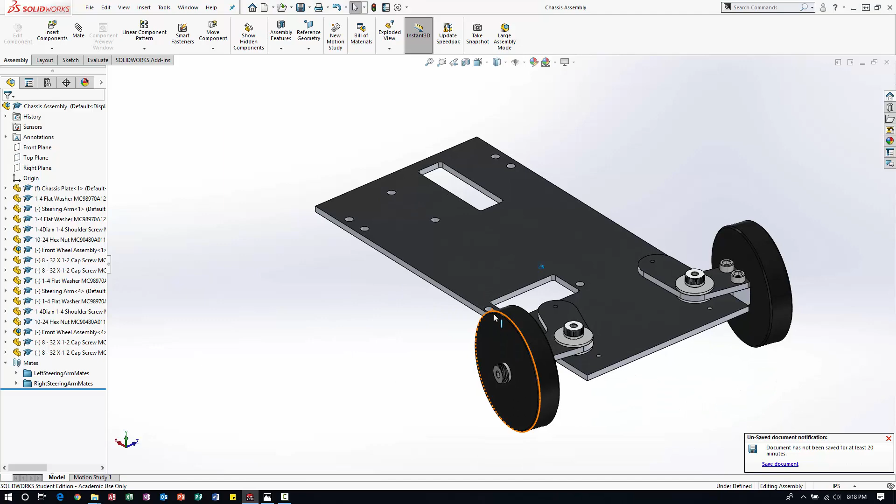This video should be much shorter than the last one. We basically built the foundation already. Save the document, make sure you always save. All right, we have two independent steering arms right here, and what we want to do is connect them. Let's jump right in, we're basically just finishing the front half. Now we'll add the steering rod, the servo, and connect everything up, so it shouldn't be too bad.

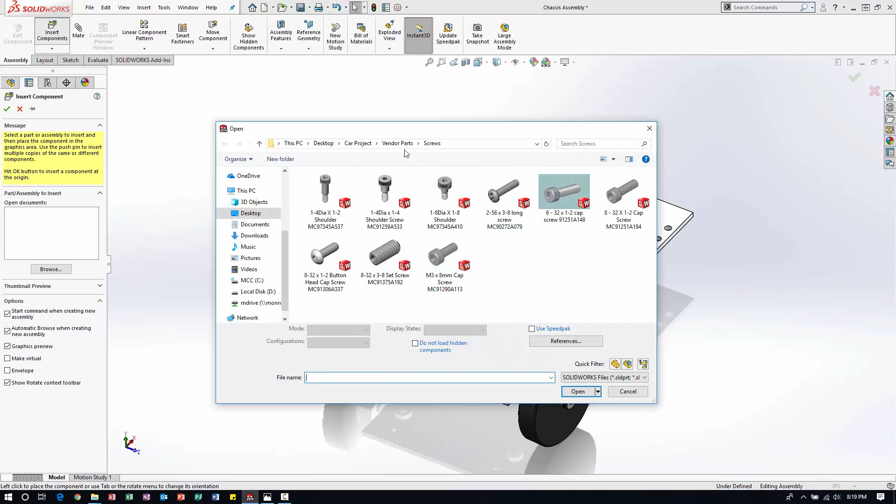Let's do that. I'm going to insert a component, it's going to be car parts 1, and I'm just going to insert the steering rod. Click open. So I have that inserted.

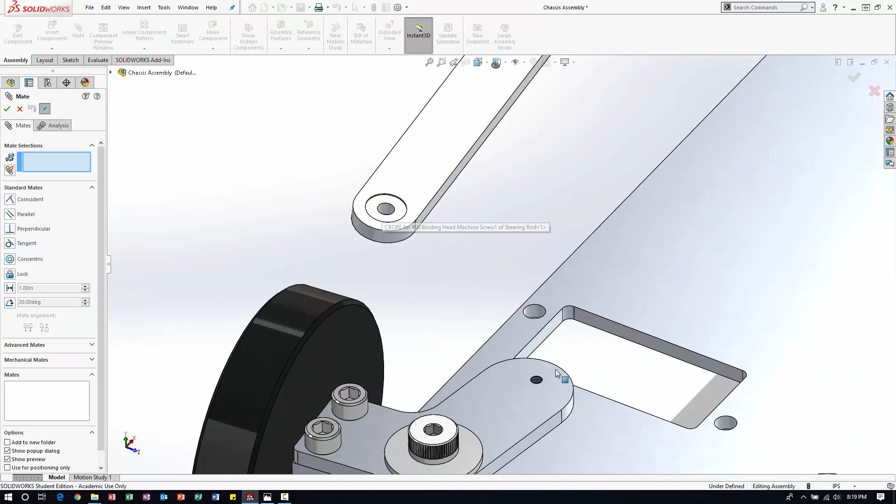Let's add some concentric mates between these two, to link the two steering arms together. I'm going to add a concentric mate here between that face and that face, between these two circular features. Another one here.

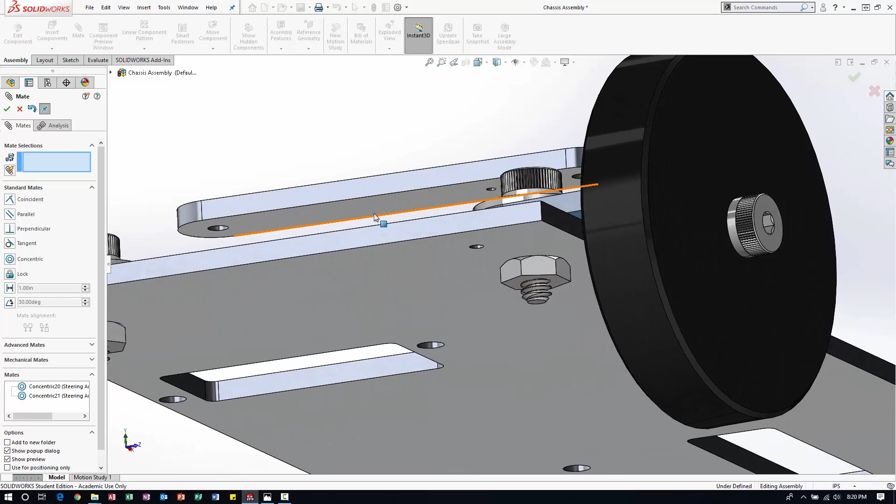Now I can move these up and down. So what I want to do next is add a face to face mate. Click OK. Let's look at it from top view. We're basically linking the two. Perfect.

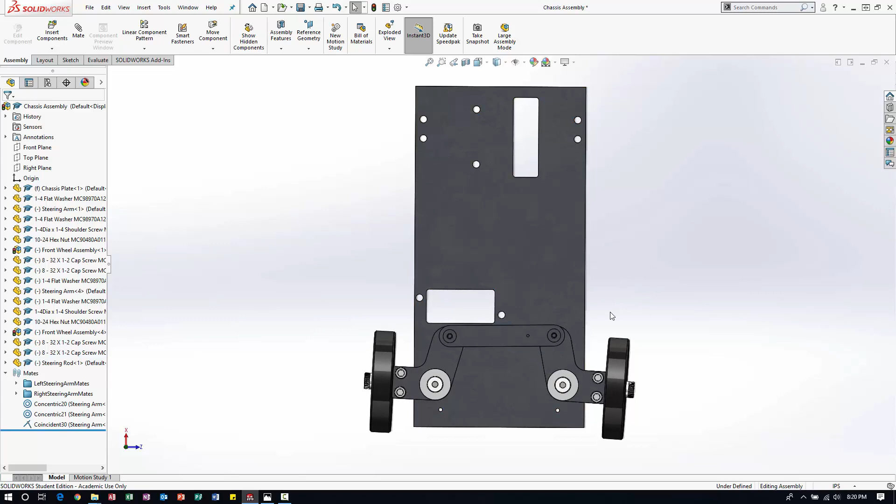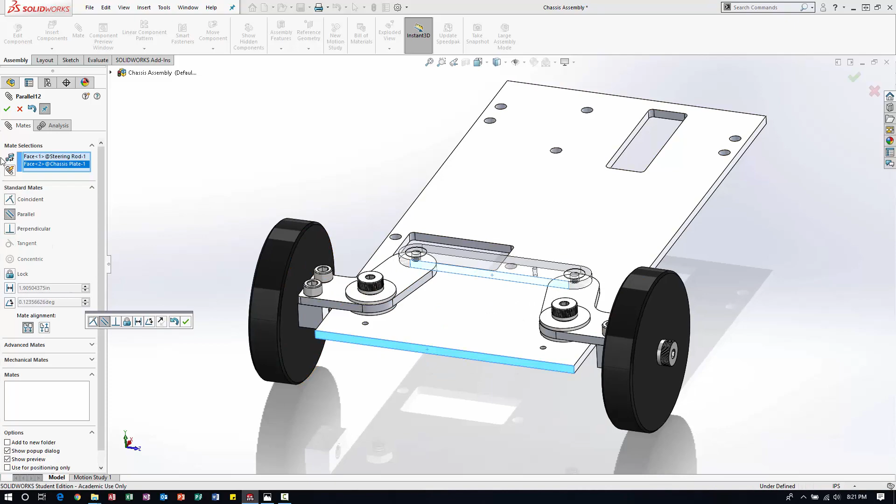For fully fixing that, for the purpose of if we want it to be straight, let's add another mate that we can suppress and unsuppress as we like. I'm going to add a parallel mate here, and what that tells me is that if that parallel mate is active, these are straight, I can't turn them, because of that parallel mate. So that makes sense. I'm going to suppress that, and if I suppress it, I can move this.

Speaking of that, let's add a new folder, again trying to keep everything neat. Let's call that Servo Mates. We're going to add the servo, and the whole thing is going to be driven by the servo, so we can just call the folder Servo Mates. I'm going to throw these in there. The reason why is this tells me that there is one that's suppressed or unsuppressed, so imagine having all these open and trying to find the right mate. So organize them in the folder, it makes it so much easier.

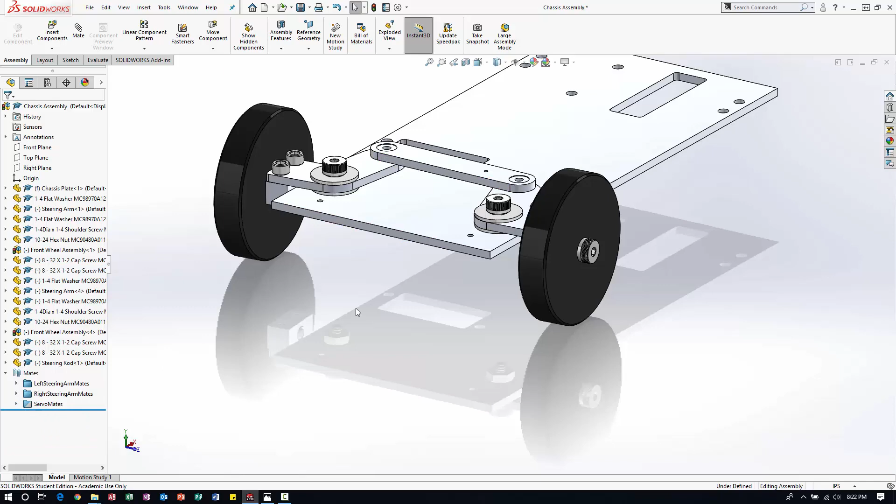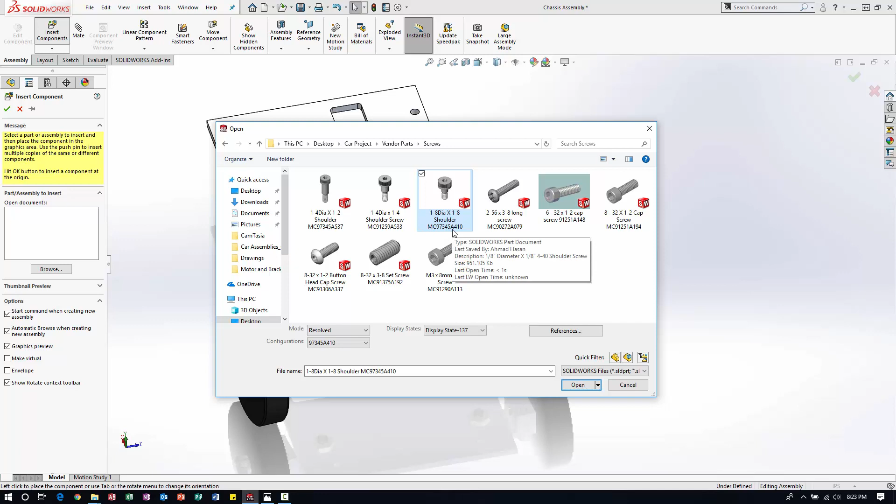So what I want to do next, let's throw in our two screws. It's a 4-40 shoulder screw for here and here. I'm going to insert a component, Car Project, vendor parts, screws, and this is going to be 1/8 diameter 4-40 shoulder screw, which is 97345A410. That's the part we're looking for.

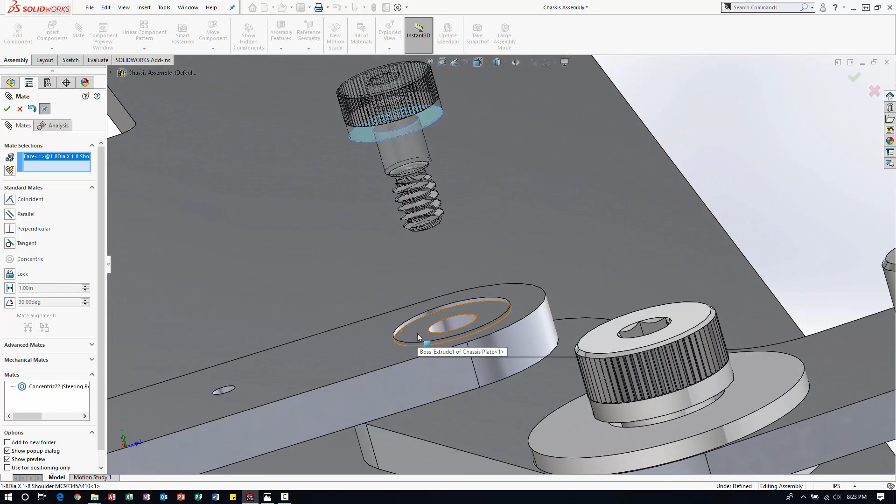I'm going to insert that here, and let's fully mate that. I can select any concentric circle to add a concentric mate, and it's going to be between these two faces. To fully constrain it, I'm just going to add a parallel relation between these two, so that it does not rotate. If I try to rotate it from here, the screw does not rotate, but the steering arm rotates.

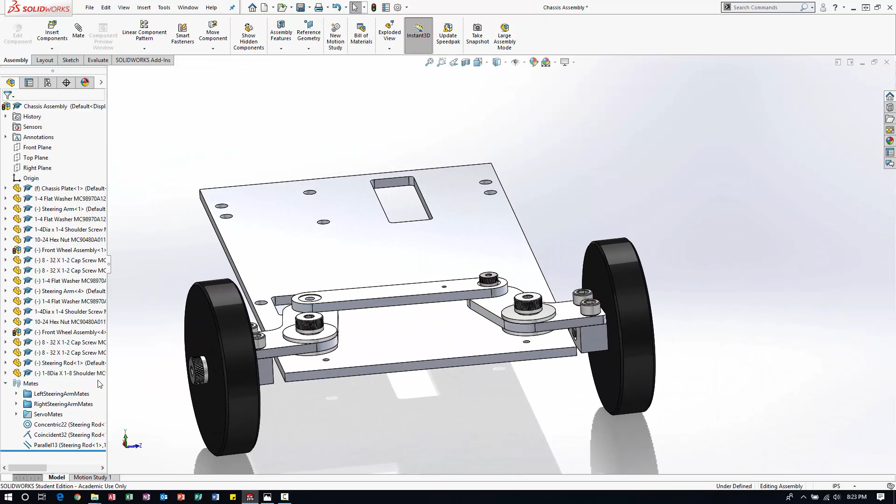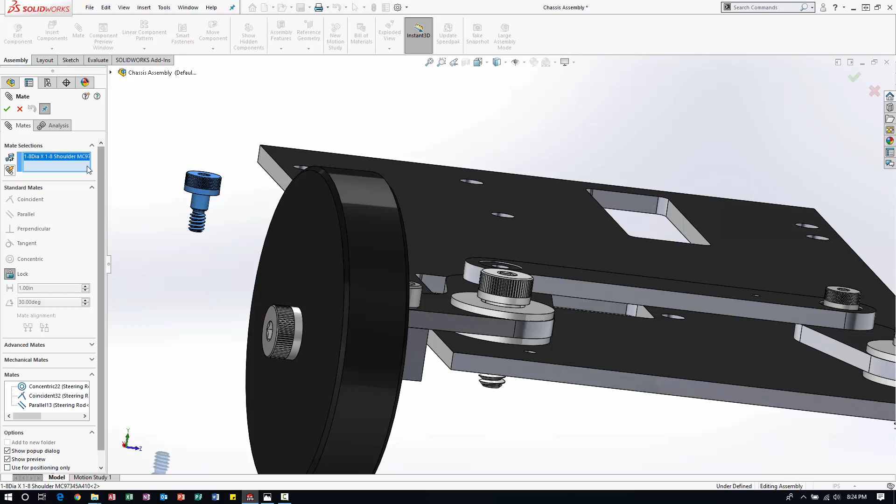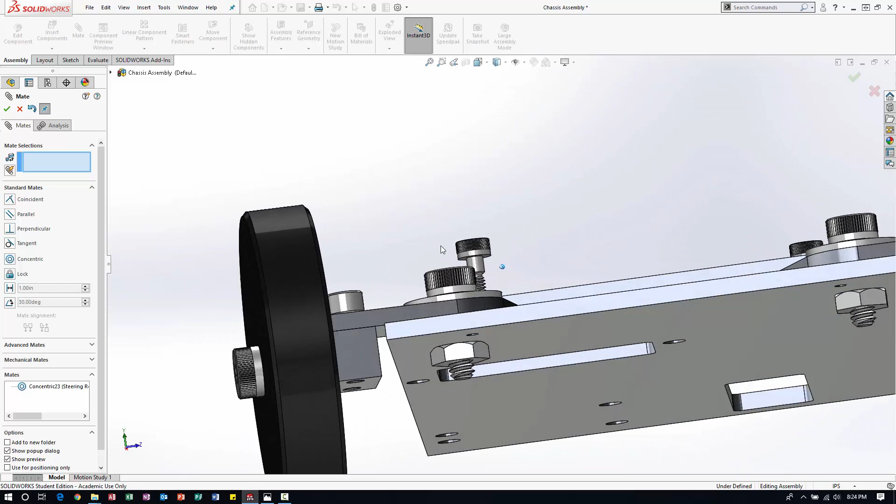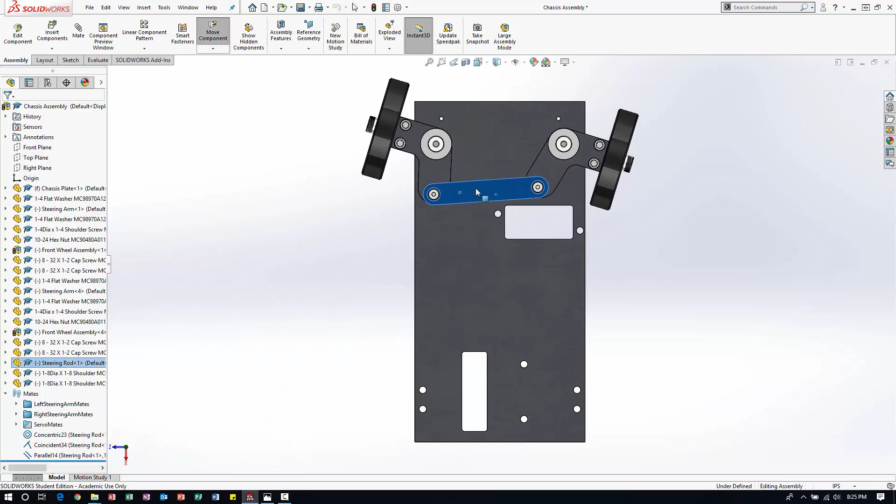We're just going to replicate the same thing here, so I'm going to throw these in here. I'm going to hold the control key and drag one out instead of going to insert components and grabbing that part back, I don't want to use that. Let's do, oops, I'm selecting the wrong one, keep selecting the wrong one. Oh, my lock is toggled on, sorry about that, it selects the whole part, keep doing that. Let's do that, it's going to mate the two faces. Also, I want to just add a parallel relation. Perfect, and if I go to my top view now, I have my two screws, and that's the motion that makes sense. Perfect, so let's save.

I'm going to throw these in there, and let's do this actually. Let's create folders here, so I'm going to create a new folder and call that left steering, or I'm just going to call it, not arm per se, left steering with the wheel, so that's included. I'm just going to try and organize everything. Should have probably done that earlier, but again, front wheel is included.

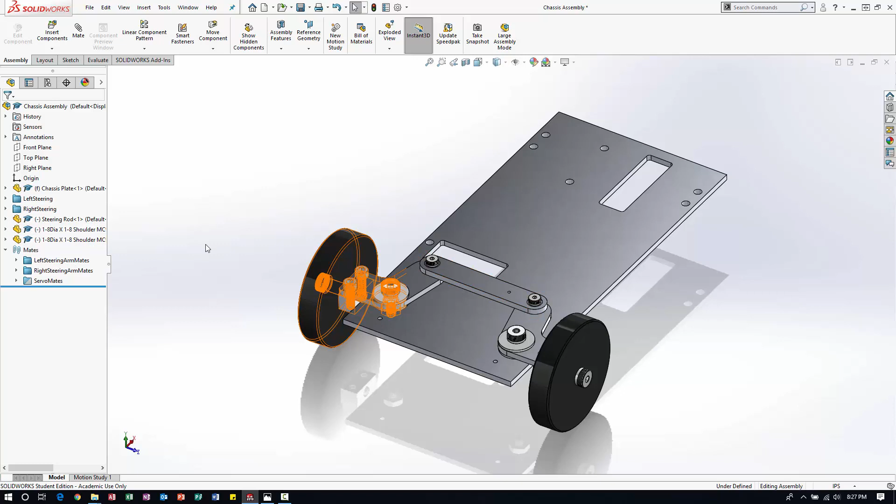Then I'm going to create a new folder, call this right steering. I'll throw the steering arm in there, flat washer, shoulder screw, the wheel assembly, and the two cap screws. We'll create a new folder in a bit for this. Let's save, again trying to keep things a bit organized.

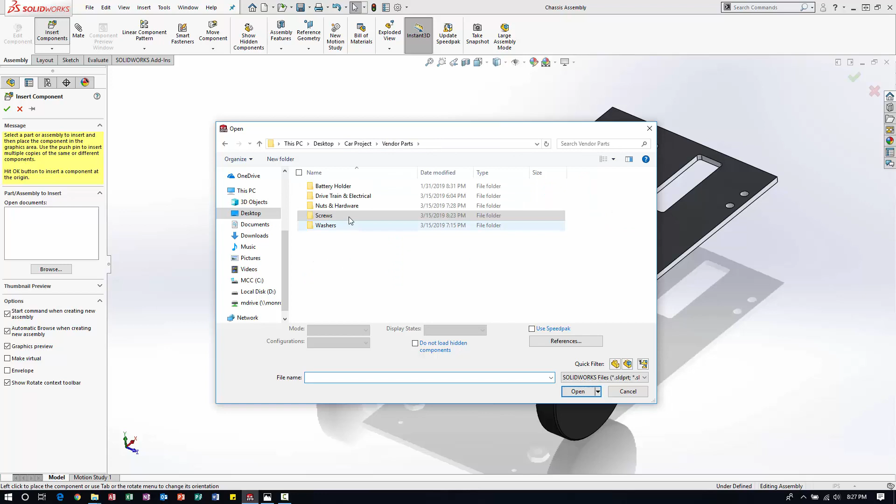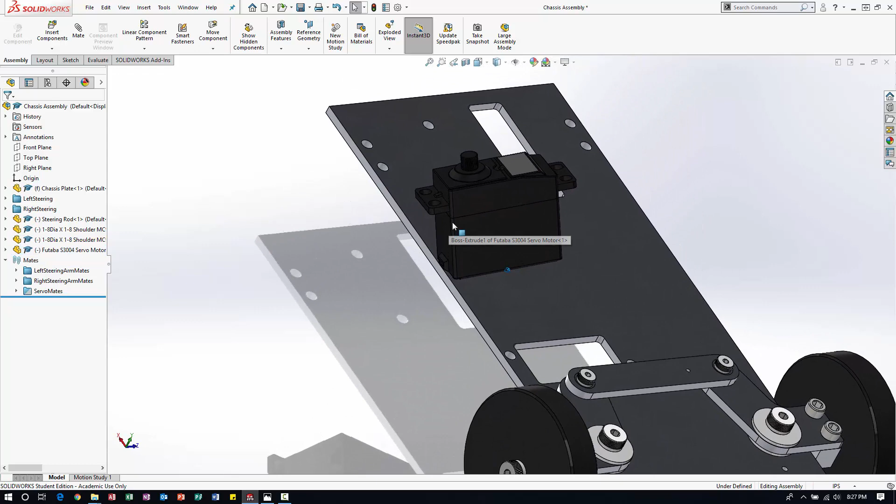What I want to add now is the servo. Vendor parts, let's do the Futaba S3004 servo motor. So the color might be a bit different for you, I've actually already built this assembly in the past to render everything and get all the drawings that you guys use, so my colors might be a bit different, but that's just an appearance thing. If your colors are a bit off or different, it's not an issue at all.

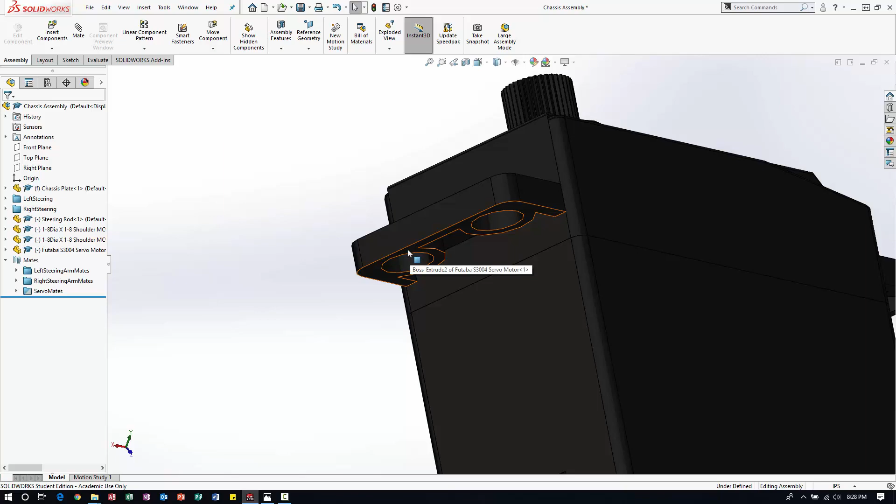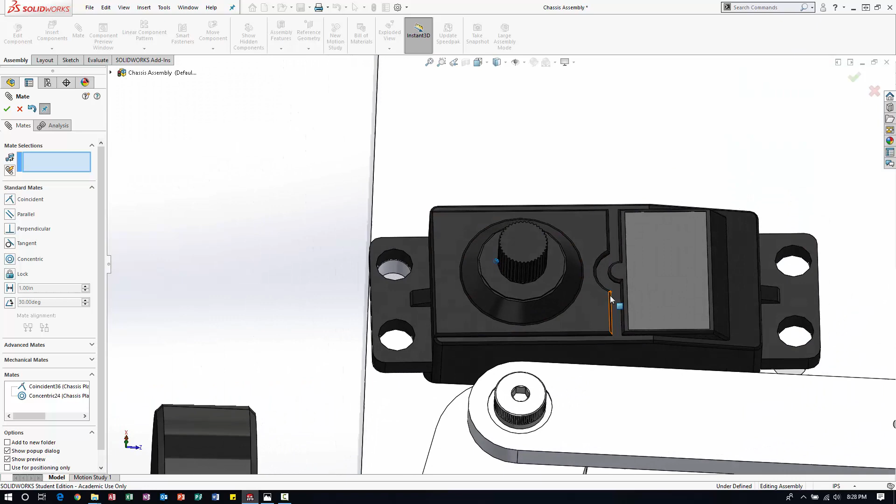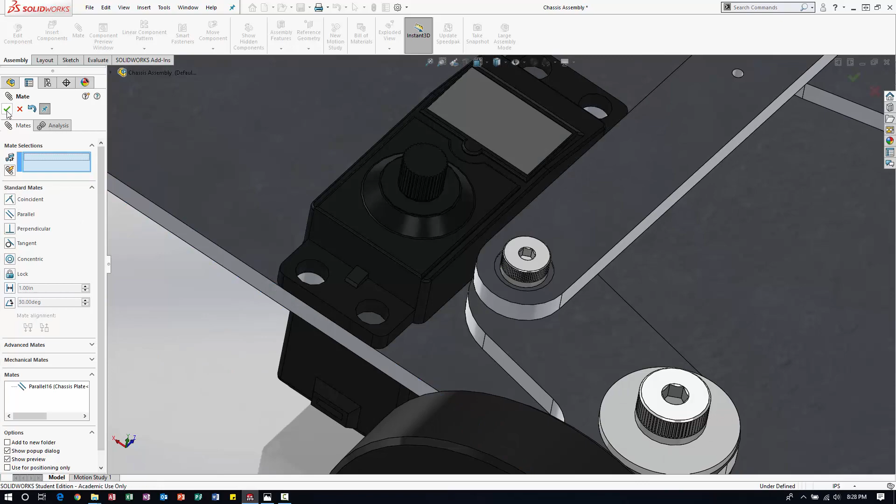The first thing I want to do is mate the location, that bottom face, and my chassis. The second thing I want to mate is a concentric mate between these two holes. Depending on if this was built correctly, you can add a concentric mate here, but sometimes it would not like it, it does not like it because it might be just slightly off depending on the servo. So the best thing to fully define this is if I add a mate between these two faces, and add a parallel mate, and that should position that hole right in the center. Perfect.

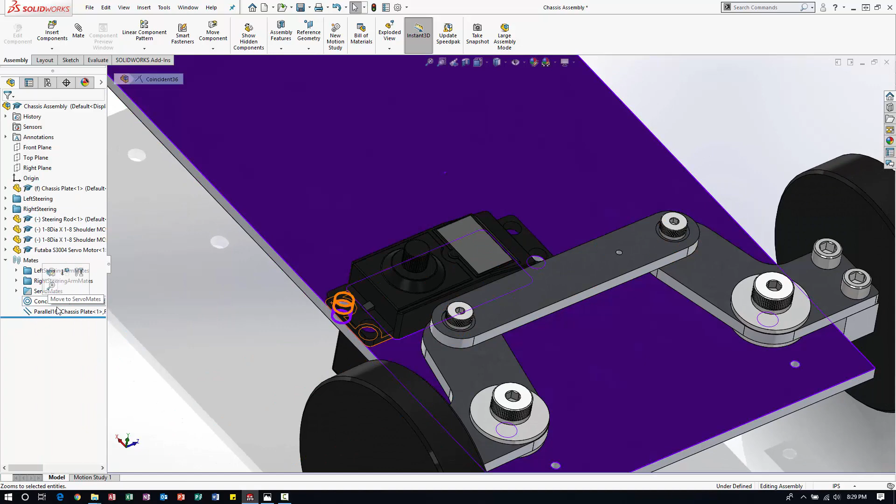So I have these. Let's add a new folder, let's do that last, so I have everything I'm working on right here, these are in the Servo Mates. What I want to add next is the arm for the servo.

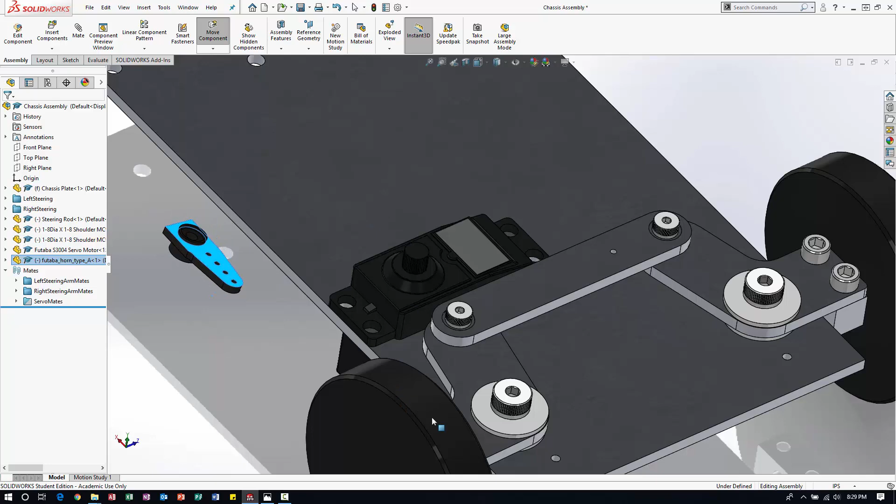Right, and your color might be a bit different, and that's okay. I just changed it to black for rendering purposes.

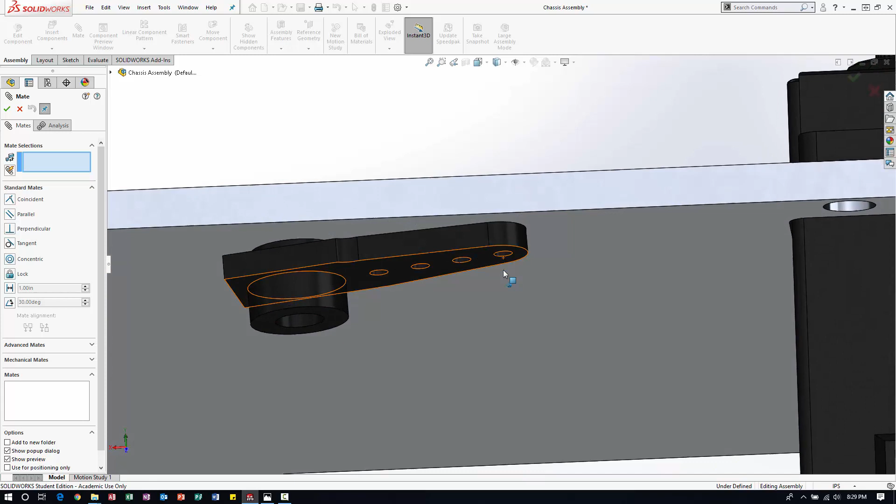This file was downloaded from GrabCAD, so all these dimensions are very close to what the real one looks like. The only thing is this feature is a bit different. If I try to do a concentric mate here, I can't select this because of the pattern, it's not a circle, so I might want to select some circular edge, maybe this one.

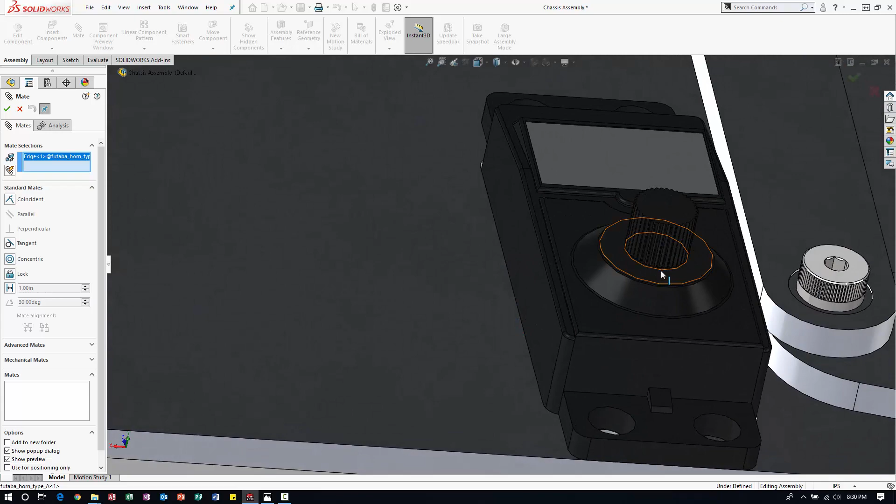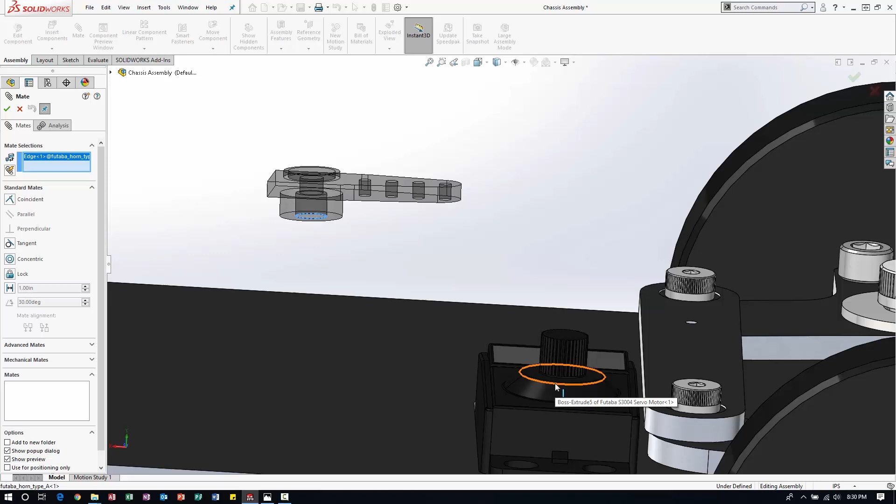Oops, it's floating in the air. Let me cancel out and bring that up somewhere here. Oops, accidentally pressed the wrong thing. Concentric, right? And if you look in there, it overlaps, and that's okay. It doesn't matter, we're just trying to show the motion and everything, so that's okay for the purposes of this course and demonstration.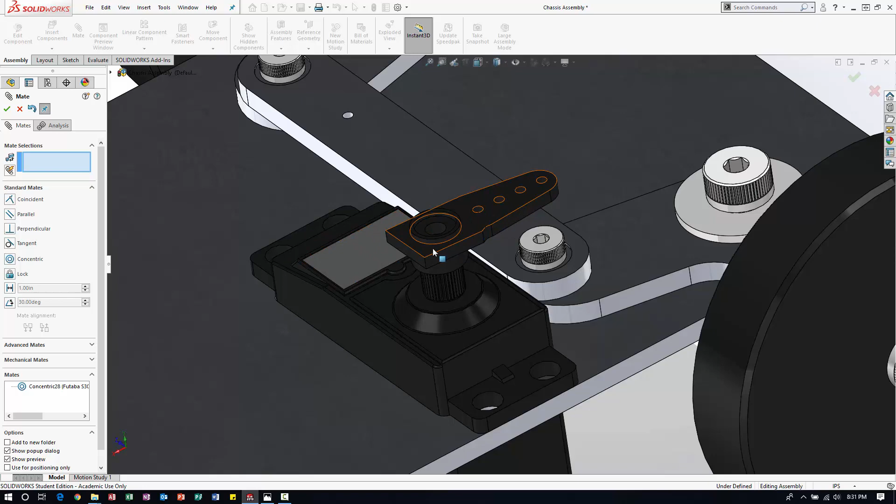What I also want to add is probably where it sits. So basically that face sits on top. Perfect. So that rotates concentrically around the circle.

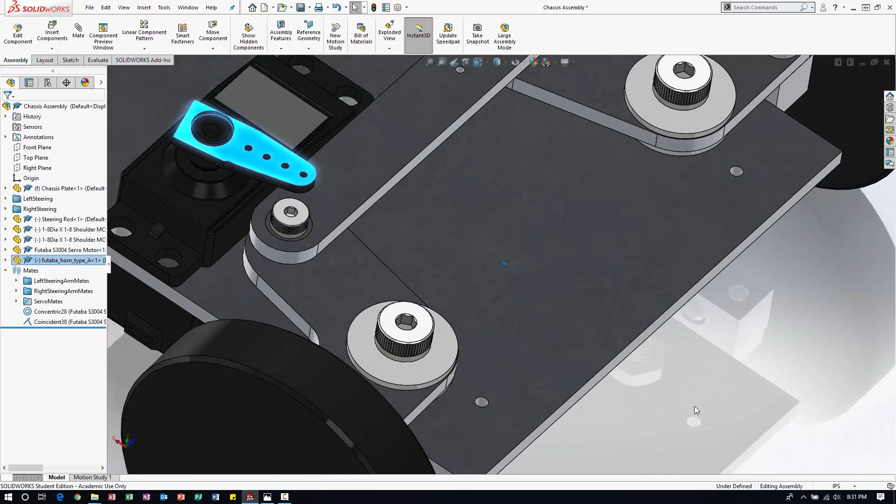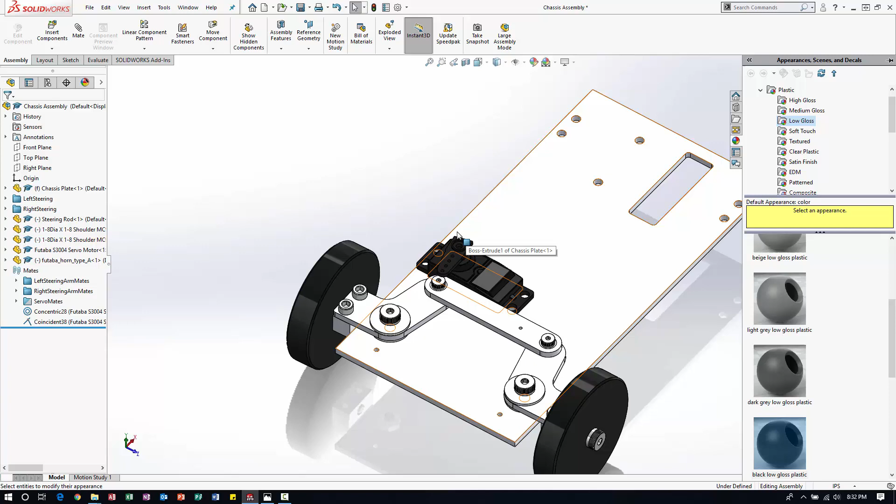Again, if the colors of these parts are a bit different, it's because I basically imported the same parts you guys have. I just added the appearance for rendering purposes when I created the packet you use, so it's not a big deal. At any point you can go in and change the appearance from here. If I click here, I can make that red, green, white, whatever you want. But for the purpose of rendering I use black, and I believe the actual ones we get are black.

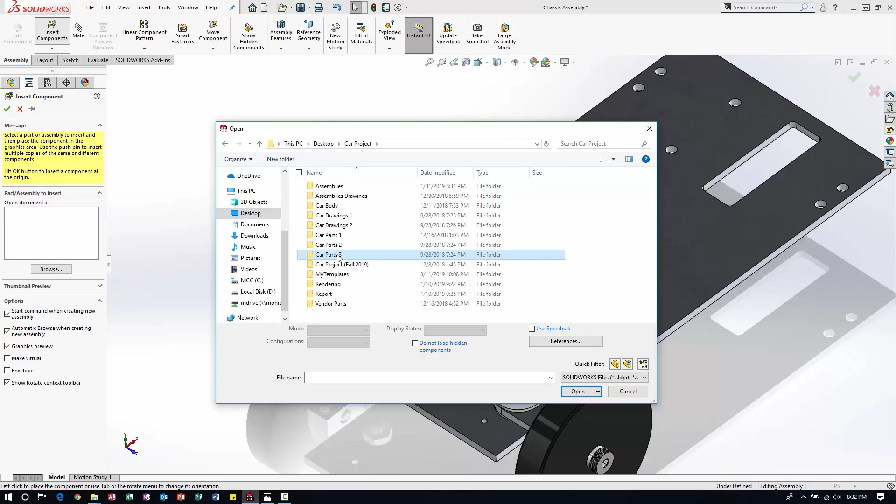So I want to insert a component here. What I have left is just the piano wire. I'm going to go to car project, and go to car parts 3, and let's insert our piano wire.

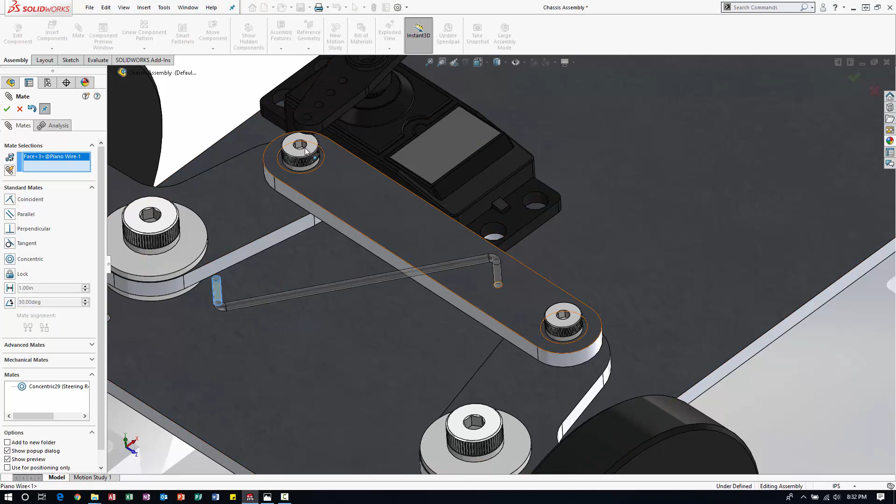Let's try and get this mated. So I have this face, I want it to go here. Let's flip direction, and I want this to go in here. Now it's floating mid air, so what I want to do is maybe add a coincident mate between these two faces. Click OK, so let's throw these mates in here.

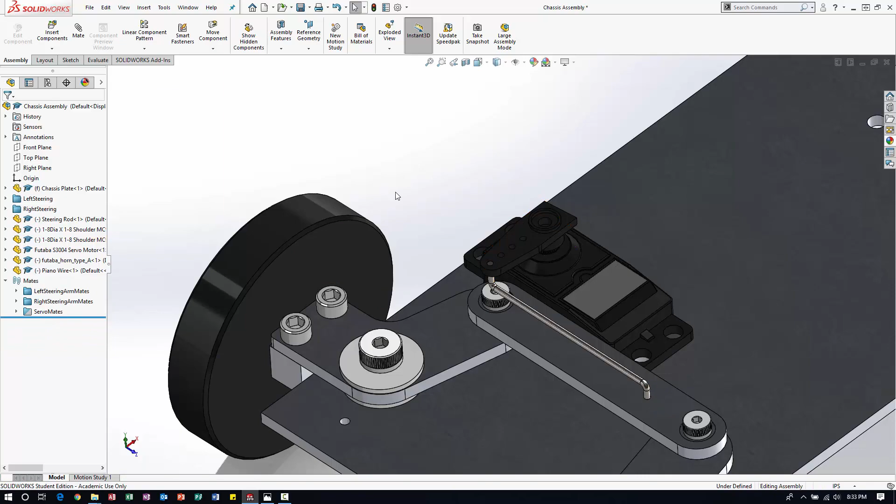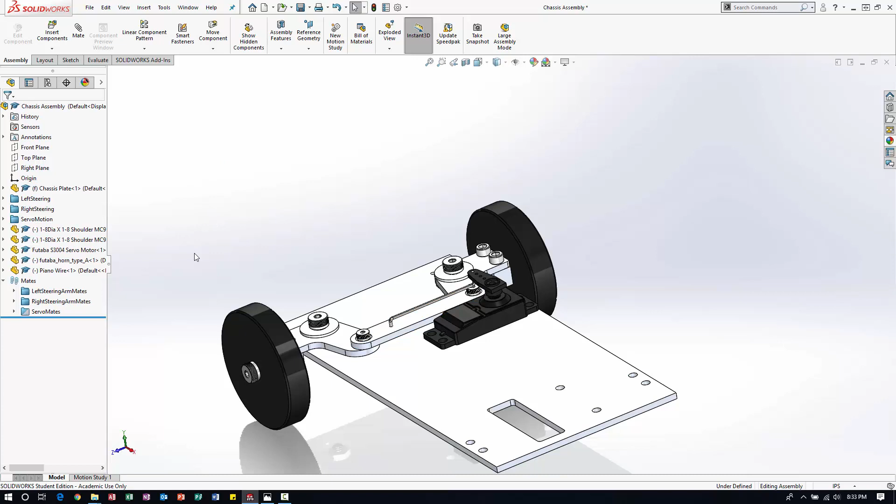And let's create a new folder, let's call it servo left steering - I have right steering, and this is the servo. What should we call this? Servo motion. Again, you can call it whatever you like, I'm just going to call this the servo motion.

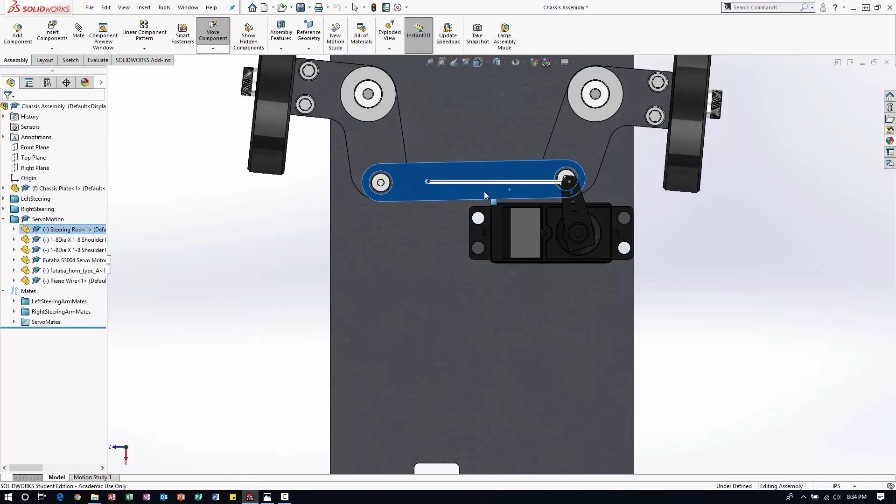So all these parts are driving that servo motion. If I go to my top view, I can move this, so my servo moves. Perfect.

So what I also need is the hardware for the servo, I'm missing 2 screws. And those screws are - just looking at mine - let's see, I have 2, I need... so I believe I'm missing, yeah, I have 2 hex nuts and 2 screws.

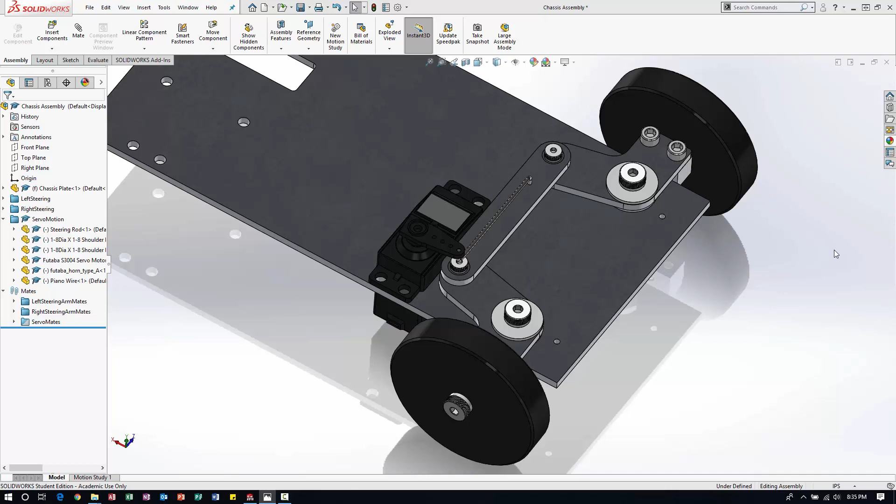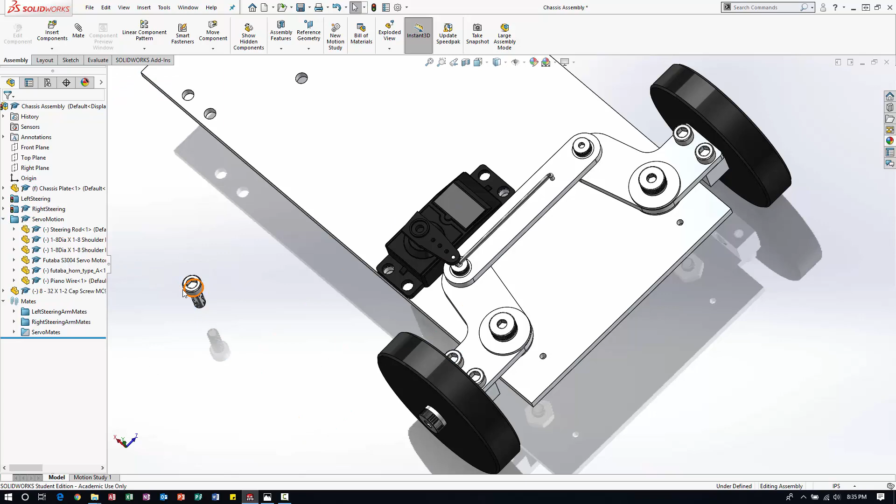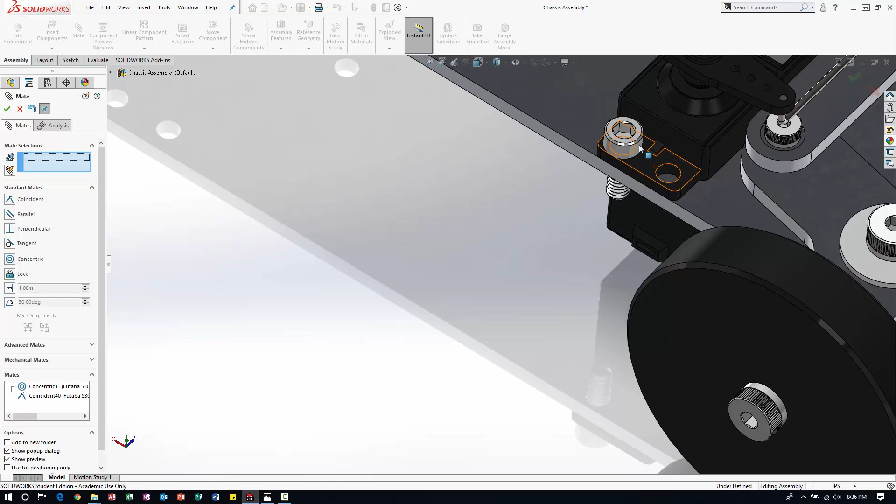For these screws it's going to be the same as the socket head cap screw, so let's do that, it's one of these. Cap screw, let's grab one out, and let's mate that. Add a parallel mate between these two. Gonna grab another one out.

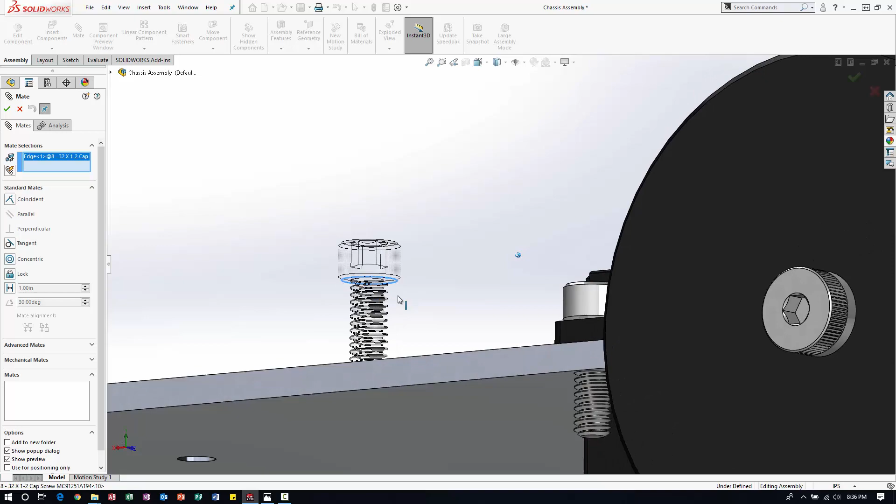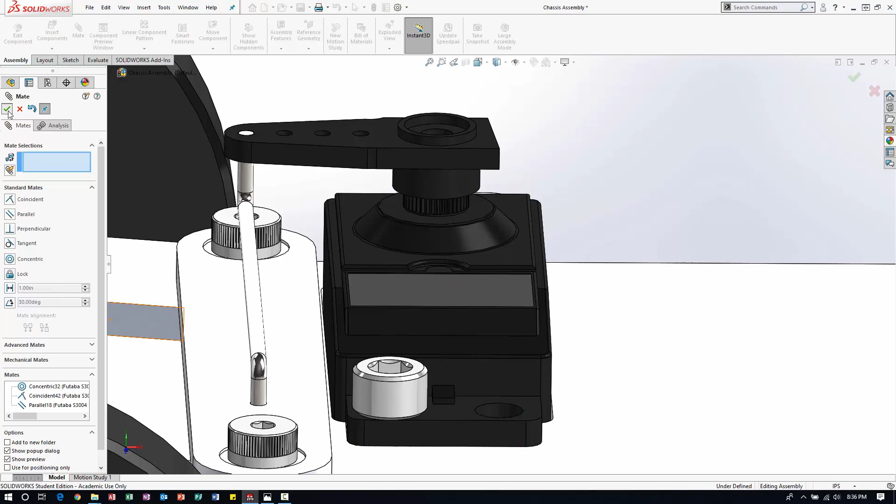Again, at this point you should be very comfortable mating things, we've been mostly using the concentric and coincident mates, so pretty straightforward stuff, some parallel mates in there to fully define, although we don't really need most of them. So let's do face to face, and maybe that parallel to that, to fully define it. Let's throw those in there.

Let's throw these in servo mates. That list is getting long, roll the mates. We also have - it looks like we have some hex nuts in there - so it's an 8-32, it's going to be an 8-32 undersized hex nut.

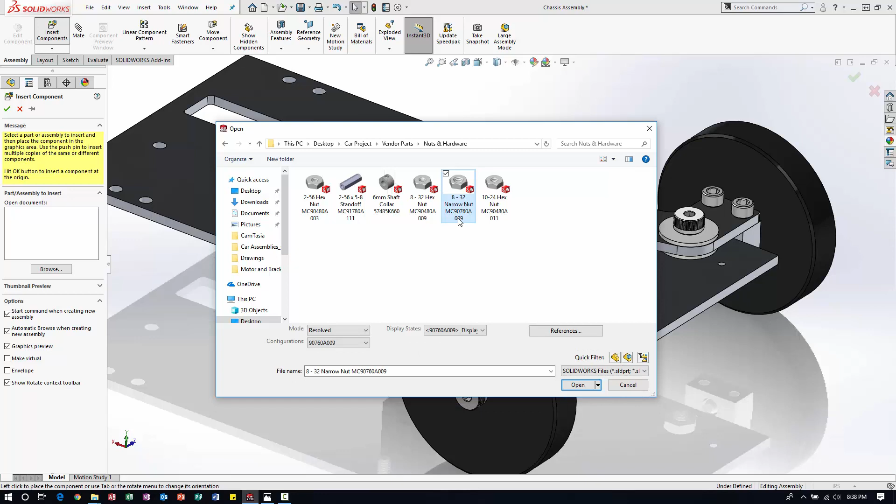So if I insert component, let's go to our project again, wherever you located that vendor parts, go to nuts and hardware, and it's going to be an 8-32. Just double checking it's 009, so it's going to be the 90760, so the narrow nut. Gonna make sure that's fully mated.

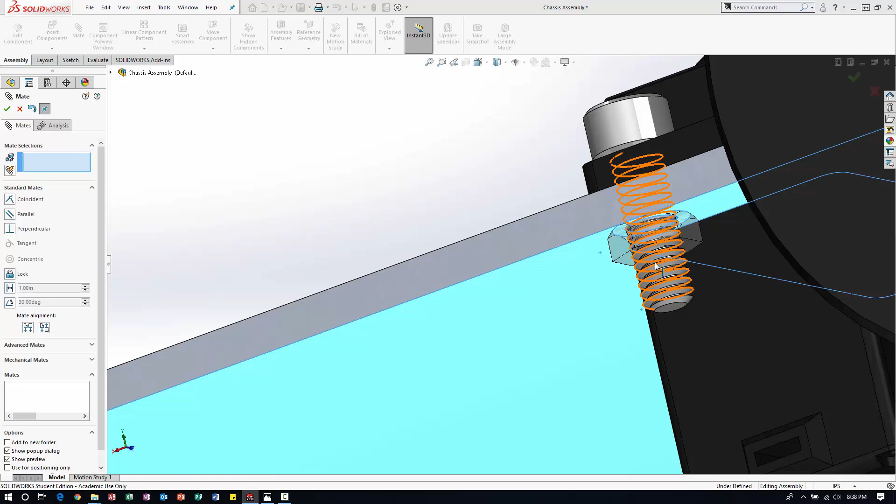Again, pretty straightforward, maybe let's do that and that face, add a parallel mate. Let's grab - oops, servo motor over constraining.

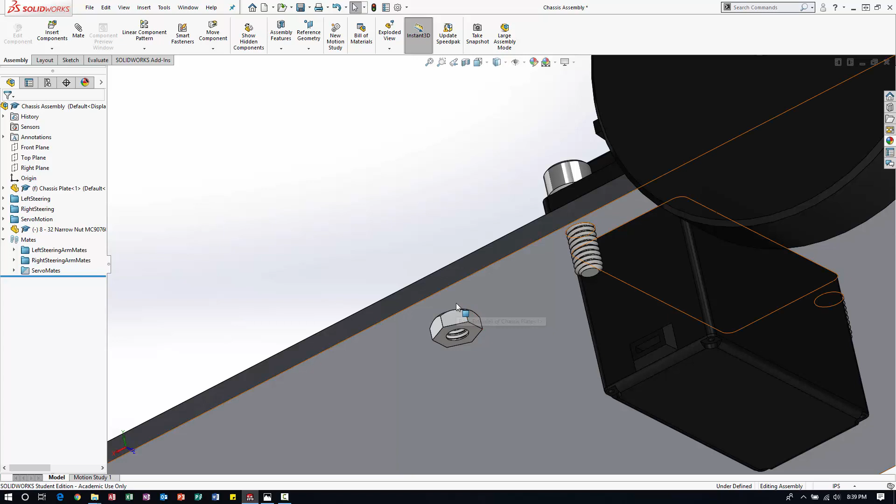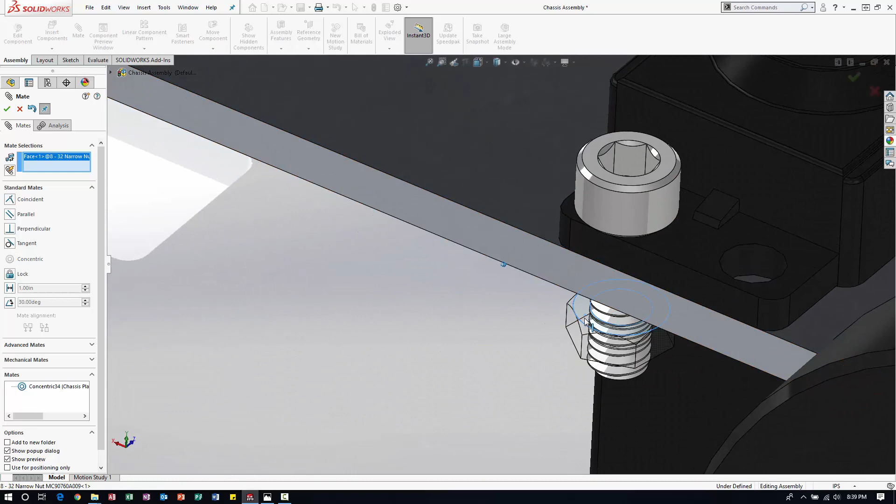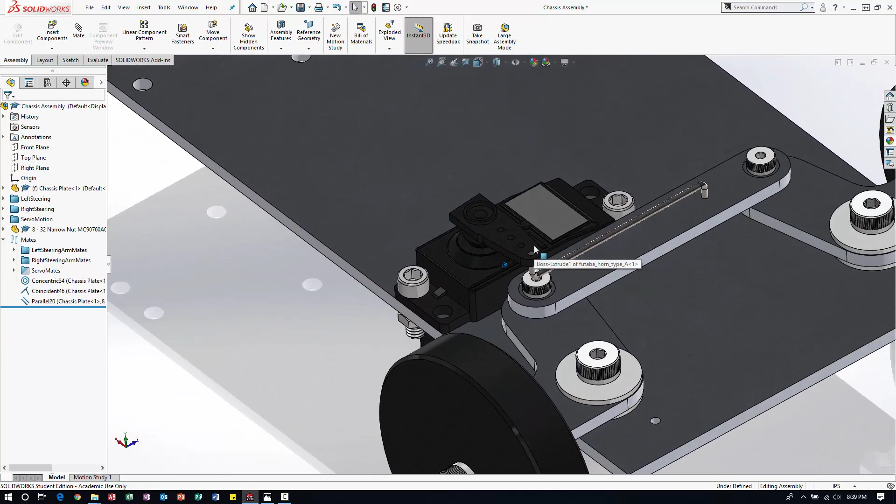Let's go back, I'm gonna Control Z. Let's see, I was over constraining something, so let's double check. Not sure why I was over constraining or over defining, so I just made it with a different concentric. Again, sometimes SolidWorks just acts weird with respect to different things, that's okay, there's always ways around it.

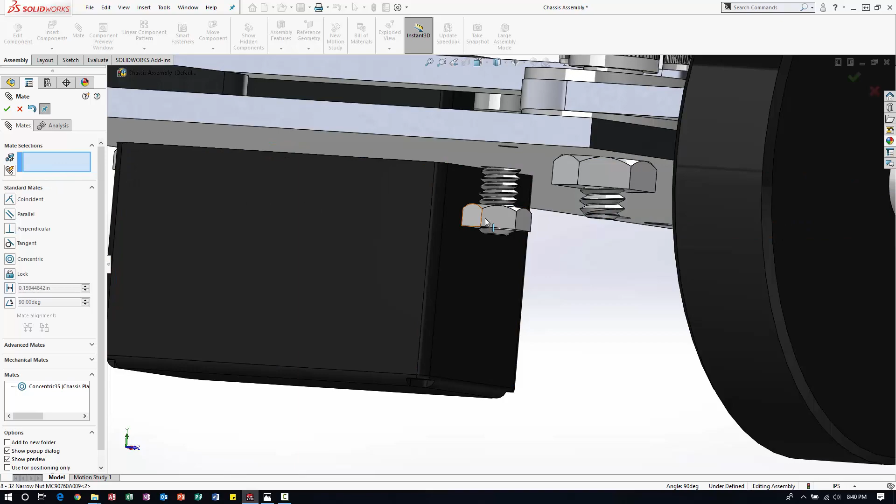So I'm gonna grab another one of these, and I'm gonna fully define that, it's gonna be here. Maybe that face. Maybe that and that face, just add a parallel relation. Let's throw these two in there, and let's throw these mates in this folder.

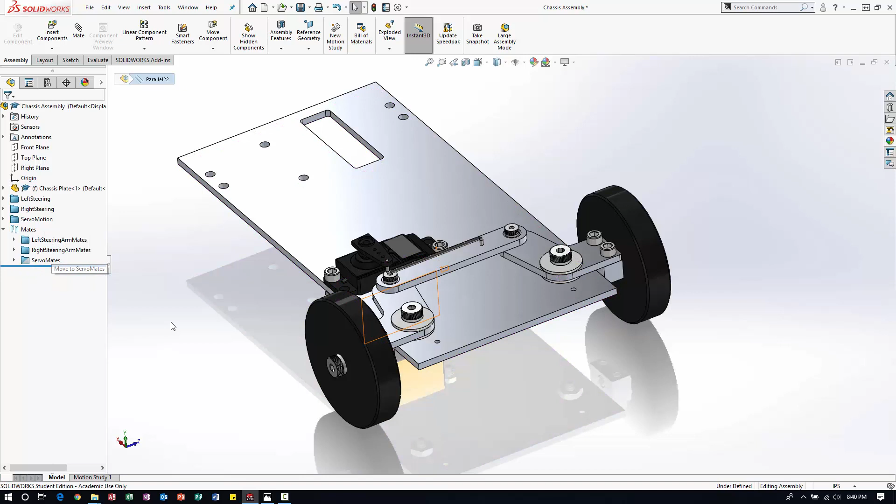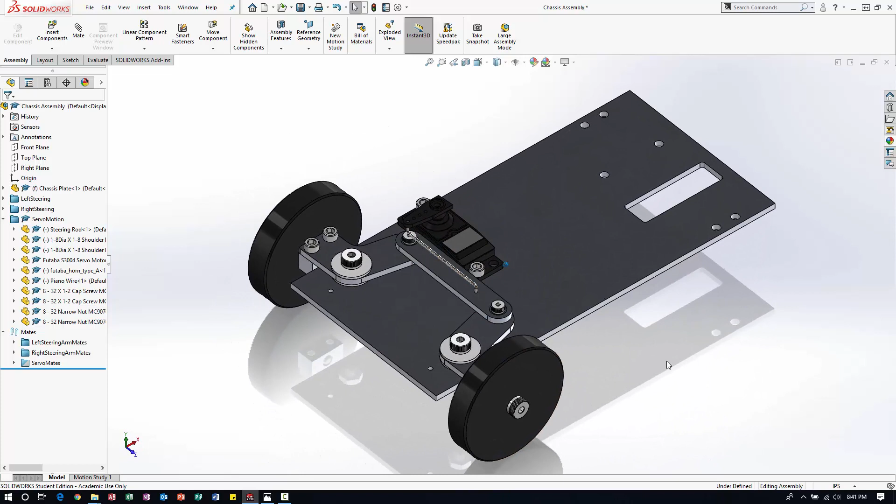So we're all set with the second video. We have fully defined the servo, mated it with the screws, and got the motion working. Again, pretty straightforward stuff, and it's not going to get any more complicated than this. We're basically just adding some standard mates to fully define our chassis assembly. So this is it for this video, and I'll see you guys in the next one.